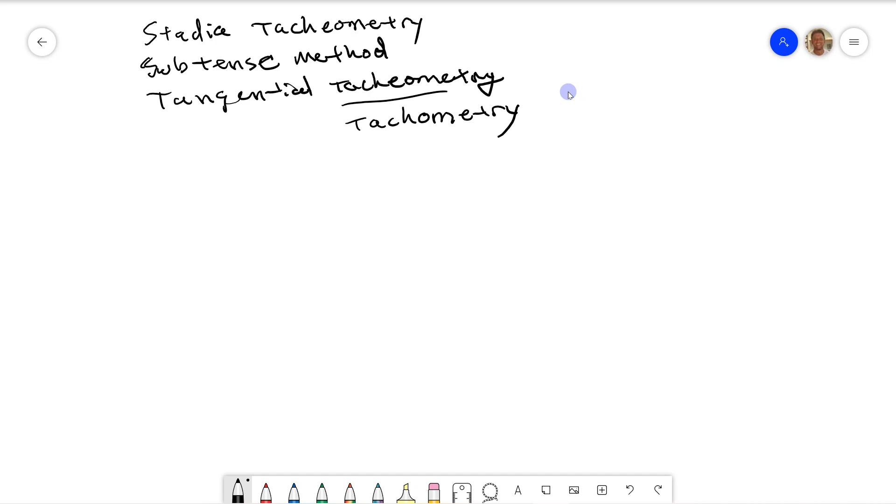Alright, welcome. In this video I'm going to show you how to do tacheometry, stadia tacheometry to be more specific. There's three types. There's stadia, and then there's subtense, and tangential. And so the tacheometry, sometimes you'll see it's called tachometry. Tach just means measure. All right, so let's get started with this stadia tacheometry.

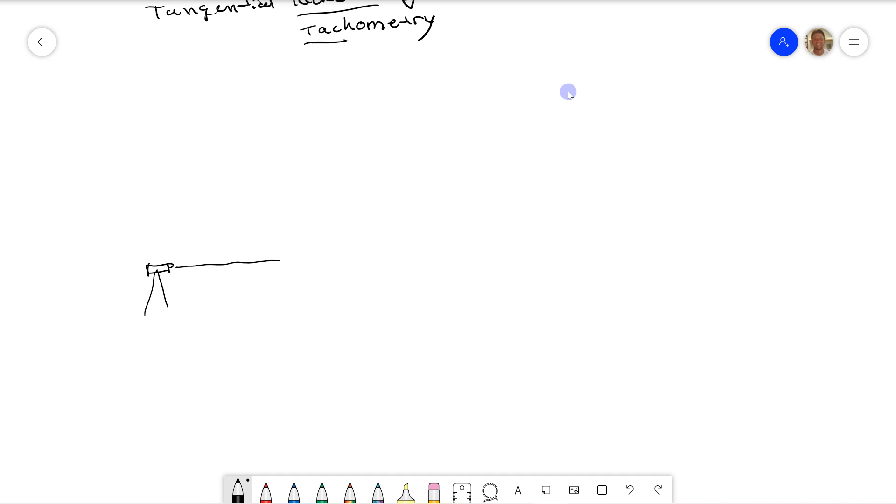All right, so stadia tacheometry, you'll see it if you're looking down your builder's level. You get a level line. You have a pole over here. You could be shooting elevation too, differential leveling, and then get your elevation. So it's called 3-wire, and you're going to get the top and the bottom too.

So there's a crosshair, and if you look down your telescope, it looks sort of like this. Your crosshairs go end to end, and on the top and bottom you'll have partial lines. They won't be going all the way to the end. These are called stadia hairs. Stadia, I think it means 100 somehow, but it's the difference here. Let's say you're shooting your pole.

Let's see what color would be good, about orange. You get a prism pole here. You got your markings on there. And the ratio of the stadia hairs is 1 to 100. So if this is 1 foot, the distance from here to that pole would be 100 feet.

So right here, let's say from the top stadia hair to the bottom stadia hair we had 3 foot. Let's go to decimals, because it would work for feet and inches or metric. Let's say you have 3.4. The distance between here and the center of your builder's level, or transit, would be 340. Could be feet or meters, whatever you got. That's how that works. So it's a direct ratio.

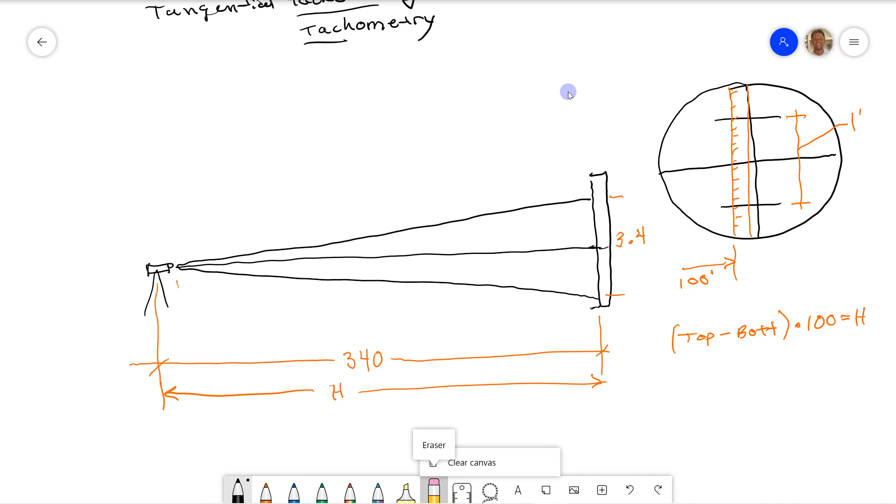So subtense method, you have a tripod, almost like a tribrach, but it's on the top of the tripod. You have a subtense bar, and it's right in the center. It's over a point. The face of the subtense bar is directly over the point. So you set it up with the tribrach, and then that locks in, and it's directly above that point. And then you're down here.

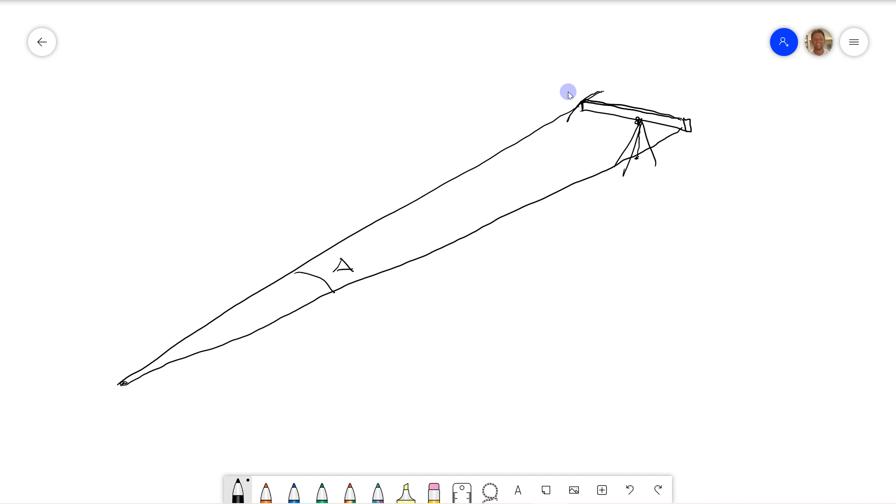Let's say you're at a different elevation, and you're shooting up. You're going to shoot the right hand side and the left hand side, and we're looking for this included angle, the difference between the right and the left. You're looking at it through your eyepiece, and your subtense bar is here. You're going to be shooting this point right here. Let's say it's a target.

And you're going to swing it back and forth until that transit line, you don't want it to go past your transit when you swing it. You're swinging it back, and you're looking for it when it's all the way at its maximum. And that's how you know you're perpendicular. And then you take a shot to the right and left, and you get your difference in degrees.

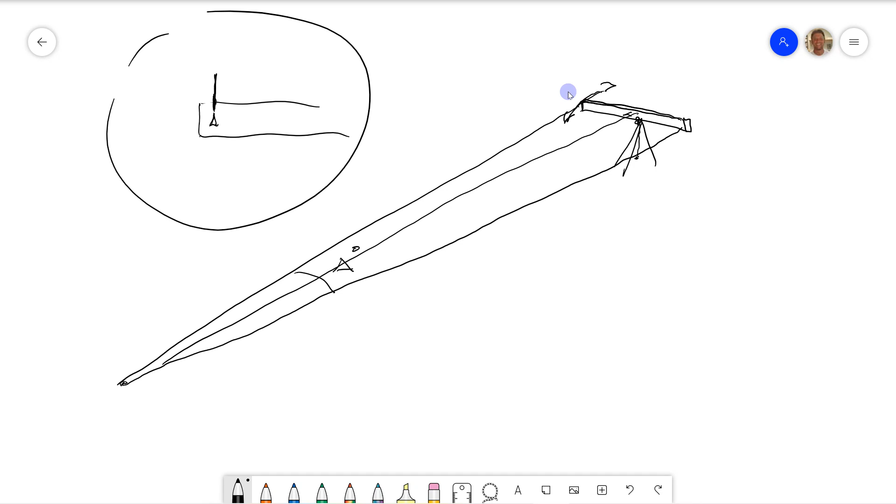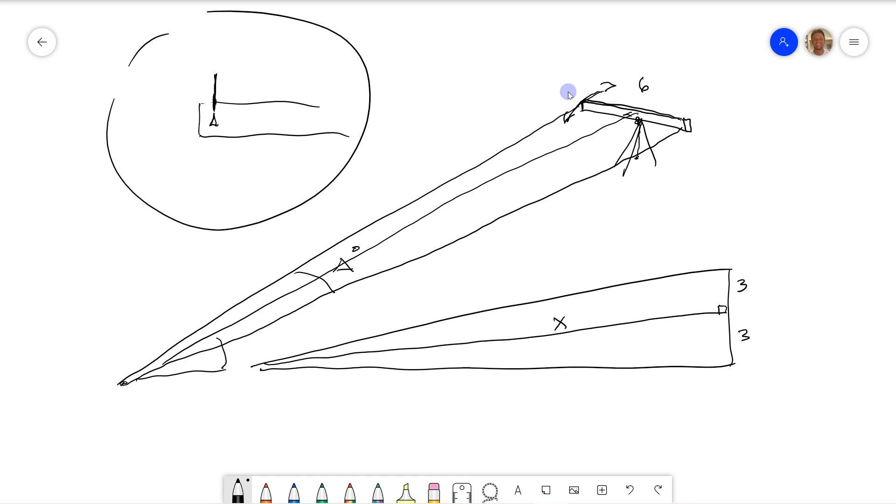And this is sort of the same thing as what we did before. You got two triangles. Say that's 6 feet or 2 meters, and you got two triangles that look like this. Even though it's inclined, going uphill, we've done a vertical angle too. This is a 3, and that's also 3. What we're looking for is this dimension here, the diagonal.

So we have 3, and the formula goes 3 over x is equal to tangent of delta divided by 2. So if this was 4 degrees, that'd be 2 degrees. Then we move the x to the top, and you get x is equal to 3 over tangent of 2 degrees.

Then you do the mathematics there. I don't have a calculator by me, so maybe pause the video and get one. If I do have one here, it's not the one I would want. Oh boy, that stings, man. You can't even get to it, yeah. Let's go to

calculator. So we go 3 divided by tangent of 2, equals 85.91. So x is equal to 85.91.

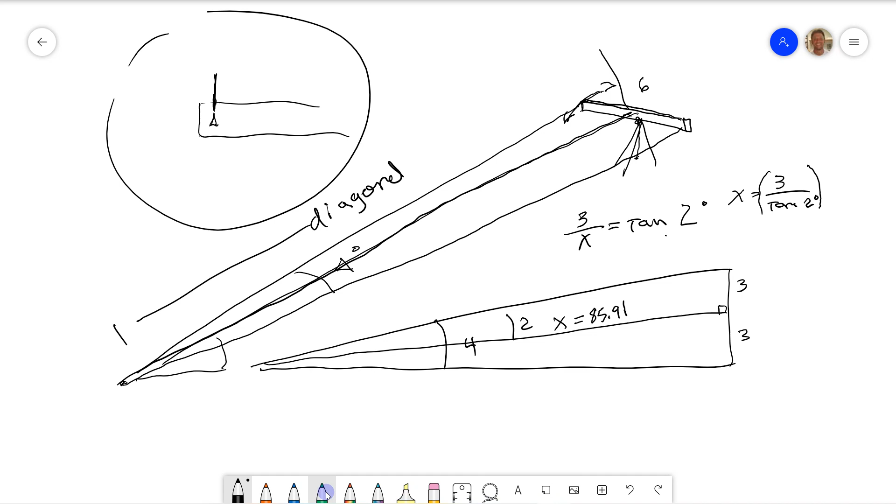85.91. And then let's check that. So go 3 over 85.91, arctangent of that. Let's just check that. So we're going to go divide. We can just divide that and inverse it, right? 3 equals inverse... 3.35. I don't think that sounds right. It should be 2, right?

No. What are we looking for? I'm trying to go back and check my work, right? Let's check and see where we went wrong. So we're looking for 3 over 85.91. 3 divided by that, with the arctangent of that. I think I screwed up. 3 divided by 85.91 equals, then we go trig, second function, tangent equals 0.02. 2 hundredths. Doesn't make sense.

Three divided by 85.91 equals, and then second function tangent. I think I did it twice. 1.99, so it's 2. So it's 2 degrees. It's just I didn't carry out the decimal. So that's how it works. All right. Let's go back and see what this looks like. Whiteboard. So that closes out. We got the 2 degrees that we were looking for, and then 4 degrees.

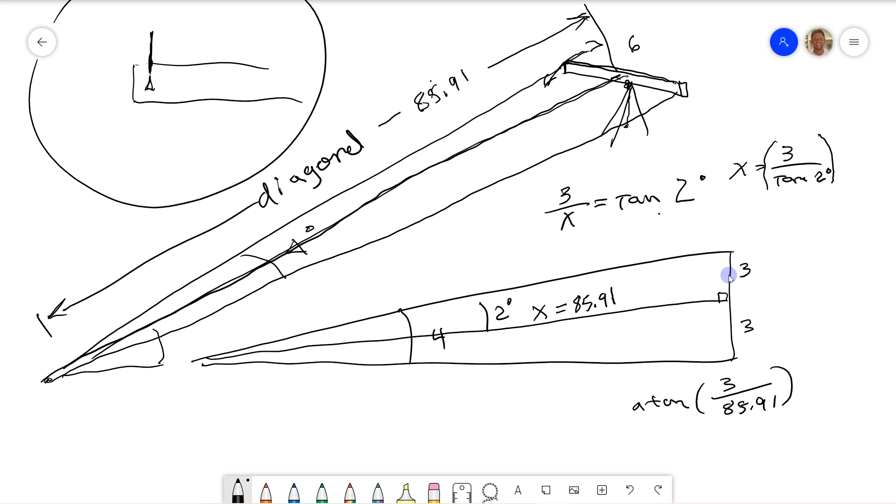Multiplied it by 2. So now we have this diagonal distance, right, from here to here, because we're going to multiply that by 100, right? Or no, we don't have to do any of that. 3 over x, and it just gives us the straight up. 85.91. And then we did, I think, in the previous video before it got blown up, and we didn't record.

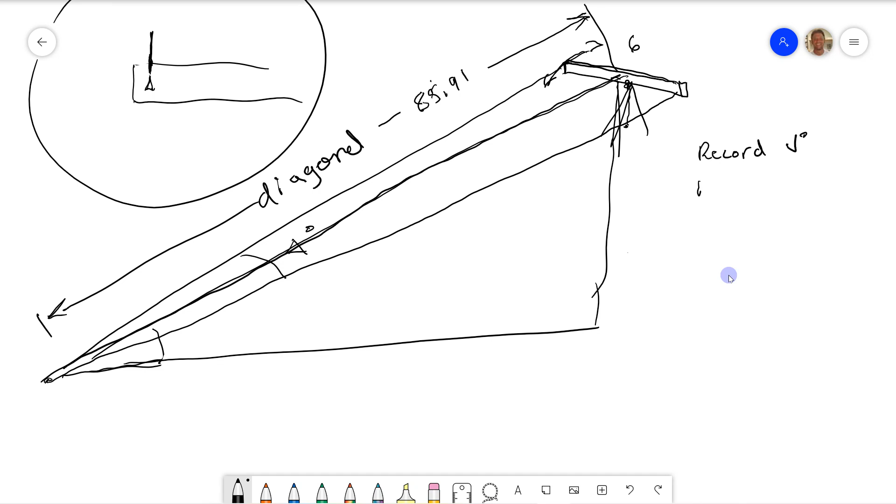You have to record. So there's 3 things you do. You record V, vertical angle, record top and bottom, record right and left. That would equal your difference in angle, this one here. And then you got to divide it by 2. We did that. And then we had V, the vertical angle, so we had the diagonal. And we're looking for the horizontal, let's call it H.

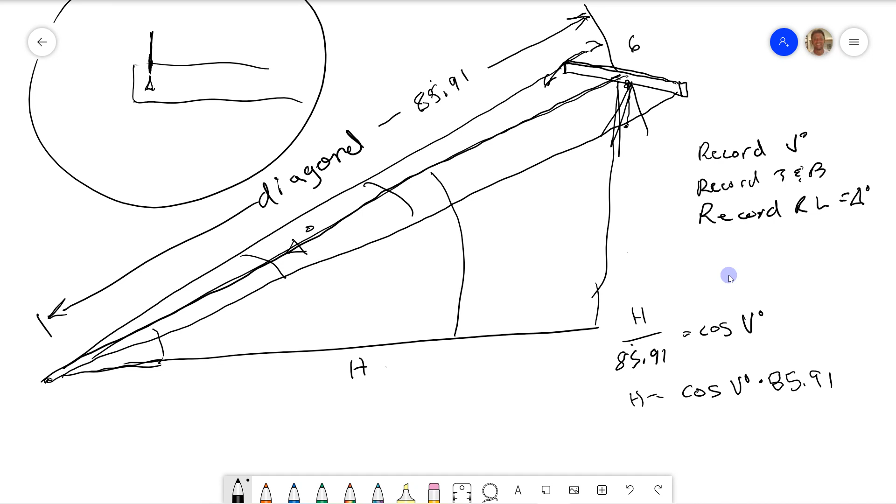So H over diagonal 85.91 is equal to cosine of the vertical angle. All right? And then you just go H is equal to cosine of the vertical angle times 85.91, and then you would have H. That's how you'd solve for H. And then this one, you could use the Pythagorean theorem.

You could use this vertical; I think I used V already for vertical angle, so let's call this Y. So you would say Y over 85.91 is equal to sine of the vertical angle. So you'd have Y is equal to sine of V in degrees times 85.91. And if you plug this into Excel, it would say sine of V, whatever the angle is.

You have to say sine of radians of the vertical angle, close, and that would give you back the sine of that. This one's pretty simple. So let's just actually put the numbers in and see what those are. Let's say that V was 30 degrees. So let's just solve them for both.

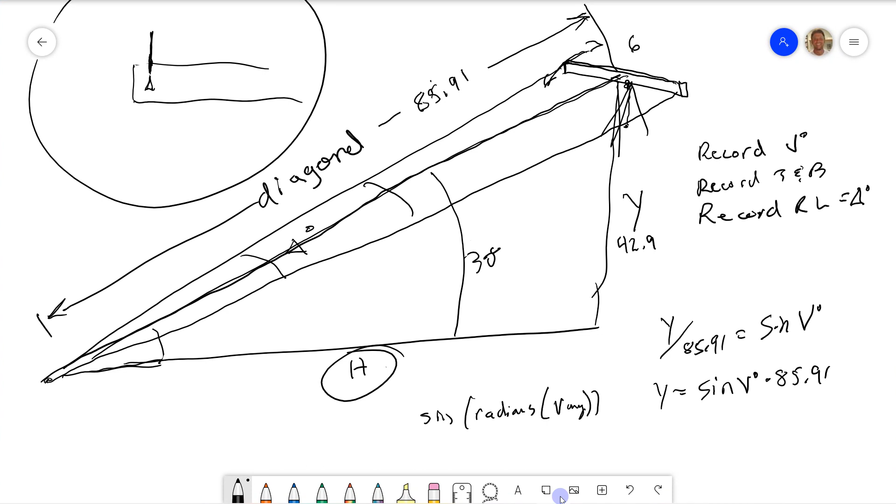Calculator, clear. We're going to go sine of 30 times 85.91 equals 42.95, 42.96. And then the cosine, same thing. 30 cosine times 85.91. 74.4.

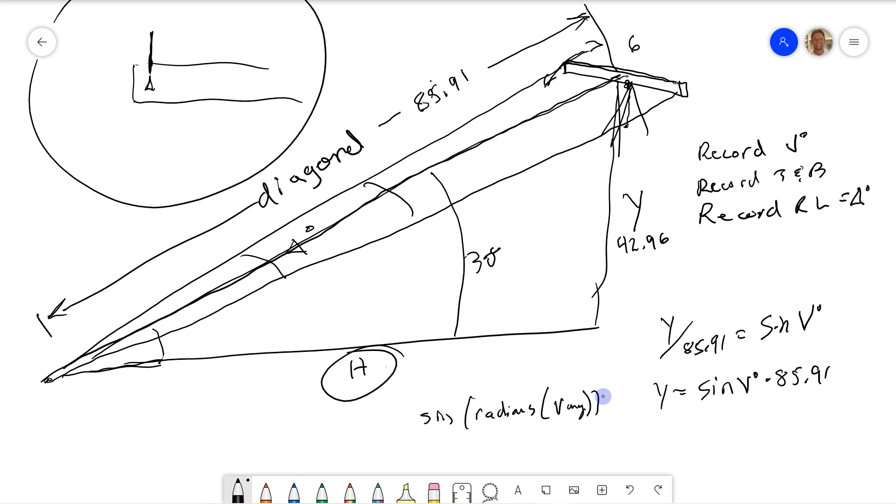So we would go 42.96 divided by 74.4 would give us the arctangent. Calculator. We're going to go 42.96 divided by 74.4. Equals, trigonometry, and that number looks right. So second function cosine. Yep, messed that up. Second function tangent. That's so weird.

Clear. 42.96 divided by 74.4 equals, then we want second function tangent, 30 degrees. Alright, and that's how you do tangential tacheometry. Let me spell it out so that we can read. And then, yeah, there you go.

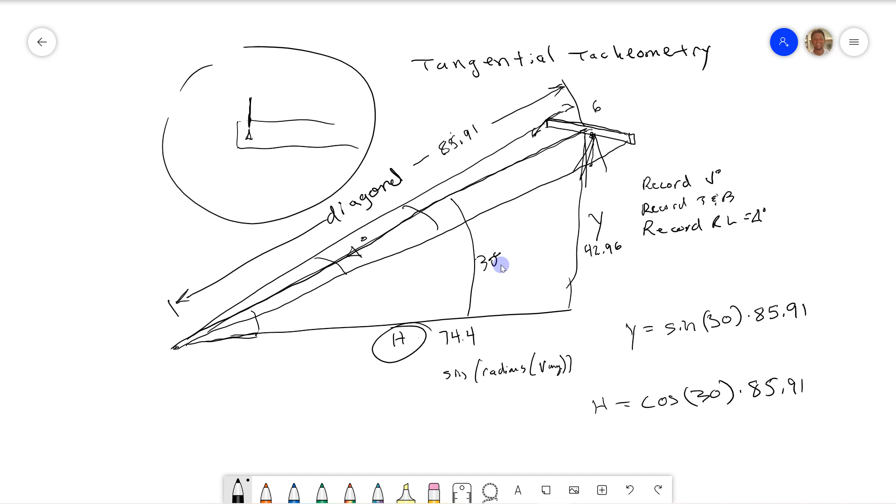And then the other one we'll put here was H. It was equal to cosine of 30 times 85.91. And this one here, Y was equal to sine 30 times 85.91. And we got 85.91 from 3 over x is equal to tangent of, we said this was 4, so that was 2. So tangent of 2, because we're just looking at that one triangle. So we get 3 over tangent of 2 is equal to x. Let's call it diagonal.

So let's do that one more time. So 3 over tangent of 2, 3 divided by 2 tangent equals 85.91. So that's how we got the diagonal, this one here. And then we did all the calculations for that. And that was how you put it into Excel if you just wanted the sine of an angle. And that's how it goes.

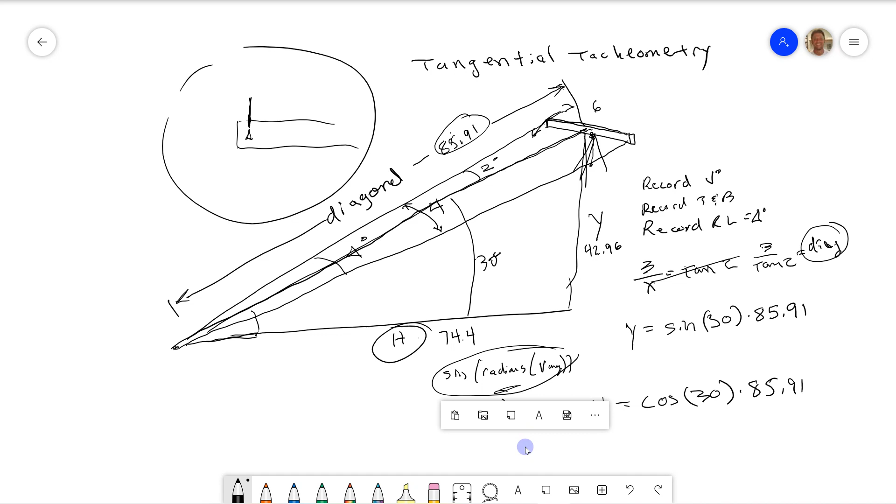So that's what I know about tangential, just plain tacheometry. There's another one, movable hair tacheometry, but I don't know anything about it.